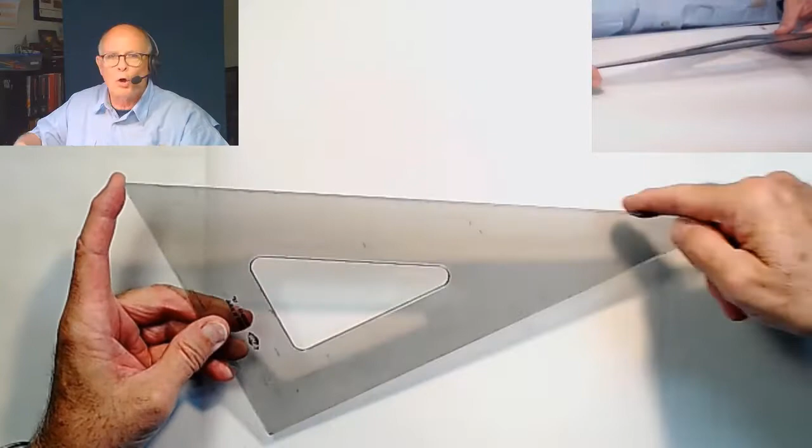An additional note is that you may want to use a larger triangle for making longer drawing lines. Since I'm doing a rough out and a block out in this demonstration, I'll just be using a smaller triangle and it works just fine because I'm going to do all my problem solving with that. When I go to do a final drawing, I may use a larger triangle simply because it'll give me a better quality of line.

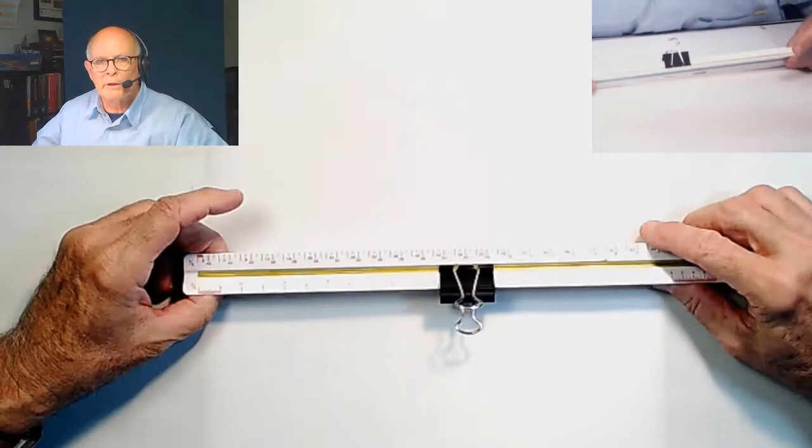Having said that, last item is, remember we are working with an architectural scale. This is the 1/8 inch to 1/4 inch scale. Just a quick note, if you happen to have a white scale, I'd like to sometimes come in and put in colors there so that I can recognize which scale I'm on. Visually, I'll always know that my 1/8 inch scale is always on this colored line, so that's helpful for me.

Additionally, I just use one of these little paper clamps here that works nice for keeping it easy to pick up and always on the right scale reference. I'm not flipping it around trying to figure out which one I'm supposed to be working on. So that's helpful for me and it just saves a little frustration down the road.

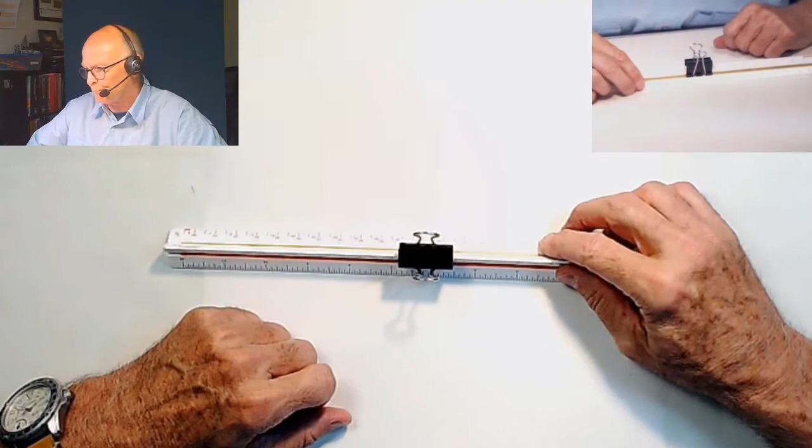All right, so things have been set up. I've gone ahead and put my 11 by 17 sheet of vellum, oriented it in a portrait fashion. That means vertically oriented, just as we mentioned previously. And I have a reference plan of the work that we're going to be doing.

So now, just as a quick review again, and making sure that you understand, we are taking a small plan and we're creating a large plan from it. That means we're going to measure at this smaller scale, and then we're going to draw it at a larger scale. That's our concept, that's what we're working on.

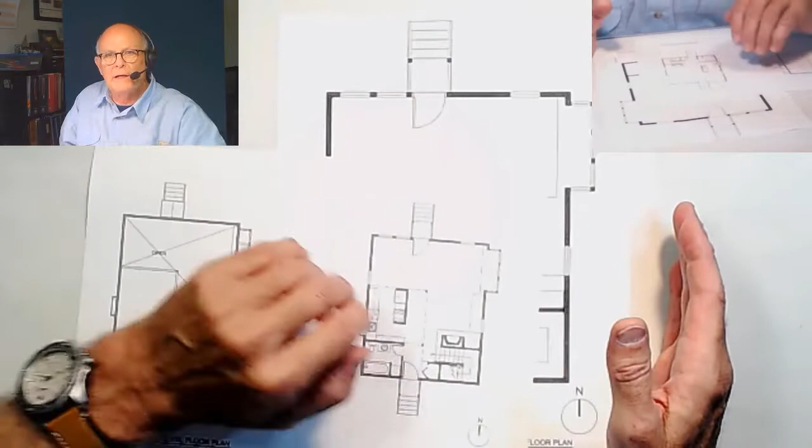So just understand that the drawing is going to get much bigger. It's going to get actually 4 times larger. So when we double the scale from 1/8 inch to 1/4 inch, we are going twice as large from here to here and twice as large from left to right. And so that means we're actually growing. This thing will be 4 times the size of this smaller drawing when we get done.

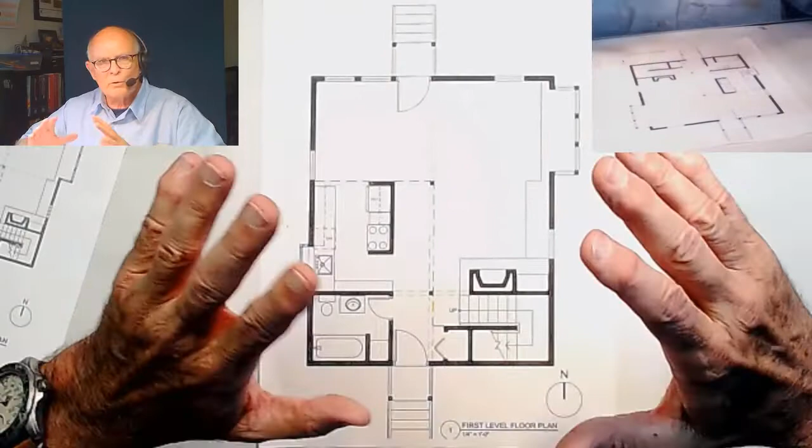You should think about that a little bit. So when you place it on the drawing, make sure it is kind of centered. You don't want to be crowding it to one side or the other because you're going to run out of room and you're going to be upset with that. So since this is a block out, we're simply going to place it somewhere in the middle and we should be okay. So we'll set that aside.

Okay, so a couple things that we need to talk about here real quick. If you look at the plan, and you should print it out and look close at it because there's some stuff going on here. There's a lot of different elements, and we'll just walk through it real quick on the plan here. We're calling this orientation the entrance side, okay? So there's a washroom right here, toilet room, bathroom, whatever you want to call it, on the left side.

A small kitchen area here. This is a very small building, very small plan. Kind of a dining, open living area here. A set of stairs right here. A small closet right here. A fireplace with a hearth, and there'll be a flush mantel overhead.

Some shelving, and then a seat. We have a solarium over here, we have an entrance porch on this side, and at the opposite side we have another porch. So those are the elements that we're working with on the ground floor.

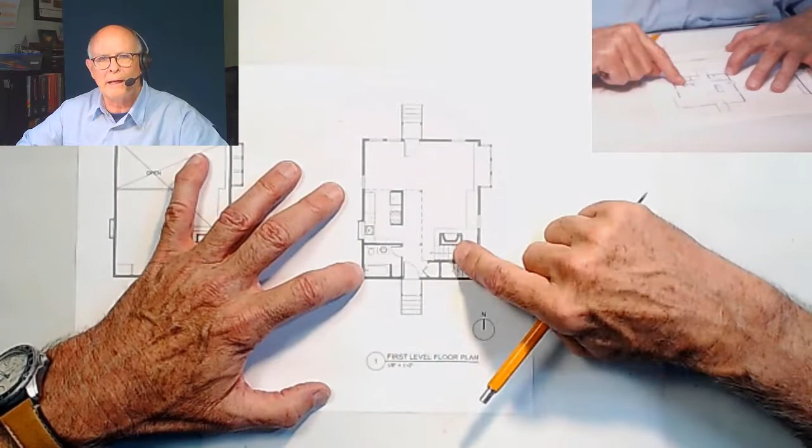When we do the second floor, it's much simpler, but let's continue on. One of the things you'll notice if you look closely is that the exterior walls, those on the outside of the building, are a little bit fatter. In this plan, the exterior walls will be 6 inches thick at a 1/4 inch scale.

So you might want to write that up here just to remind yourself: exterior walls, 6 inches. Okay, so there we go. So we've written that down.

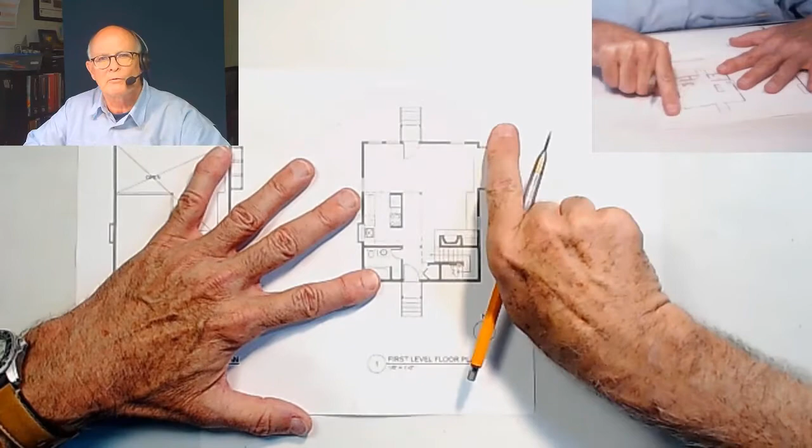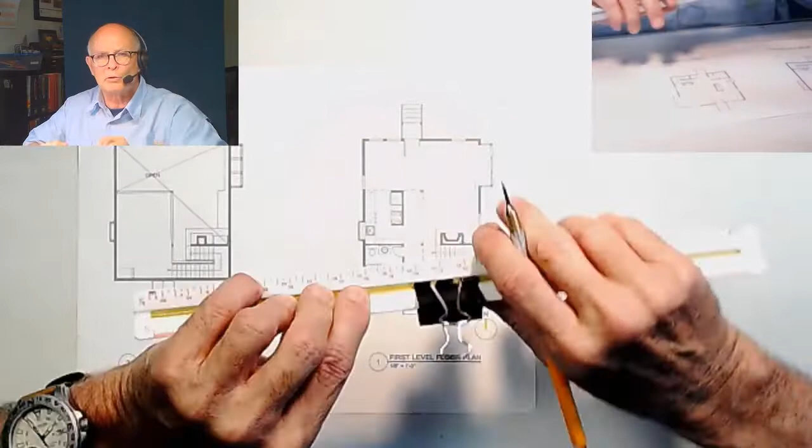But now as we go inside, you'll notice that the interior walls are a little thinner. They're only 4 inches thick. So interior walls are 4 inches, and that's at this 1/4 inch scale—actually, it'll be at all scales. When we're measuring with the 1/8 inch, it's kind of small, but you should observe that they are 4 inches on the inside, 6 inches on the outside.

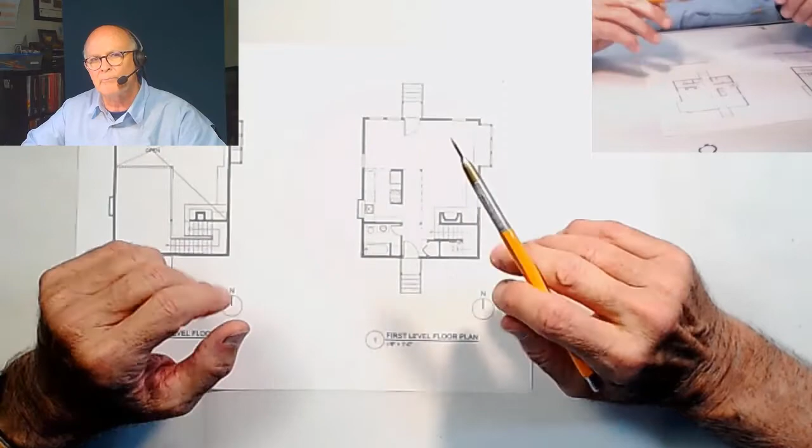And that should be pretty much the case all the way through, so these interior walls will be thinner than the exterior ones. Additionally, you'll notice that the plan has stairs going up to the porch, and some posts provided at a variety of locations to hold things up. In the case of the porch, there's a little porch roof covering it to keep it away from the elements—same thing at the other end. So you'll see a little square; that's the post in plan view.

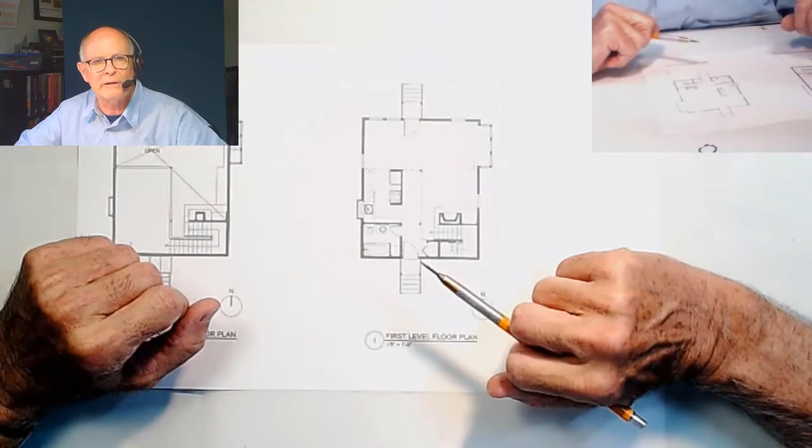Additionally, there are some interior posts here and here, so make note of that. That means there's something happening up above that we need to be aware of, and indeed, we'll see that as we go to the second floor.

There's a variety of other things here. We have a bathtub, a water closet, a lav sink. As we get to the kitchen, we have a kitchen sink. The dash lines represent overhead cabinets. The dash line in this box form is a dishwasher below the cabinet. Over on this side, we have a range, a cooking range, a small set of cabinets with overheads above them, and a refrigerator. So that's what's in the kitchen.

As we move around the elements here interiorly, we have this fireplace, and as I mentioned, we have shelving here. We have the firebox here, and there'll be a chimney overhead that we'll see in the second floor, but not on this plan. Then the stairs going up get to a landing, a flat spot, turn around and continue up. Here we see a break line, which we talked about a week or so ago. So we'll talk about all that as we get a little closer to it.

But I wanted you to know what the parts and pieces are that you are working with. And then finally, this element out here, this is like a solarium—it's like a big bay window, a little bit larger than just a bay, so we're calling it a solarium. And it's a window seat. This line here represents a built-in seating frame for placing cushions on—like a built-in couch that becomes a built-in window seat. So that's what we've got there.

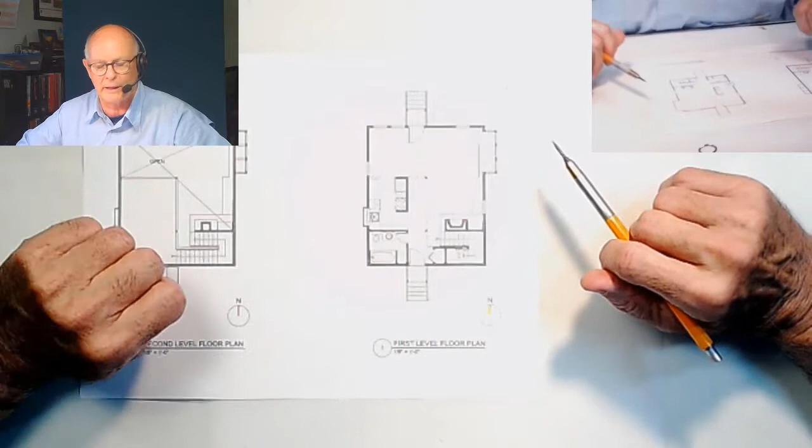The other thing we want to do is start with the idea that it's a good starting place to find the size of the object in its general sense—the idea of how big the box is. So to do that, we're going to scale that.

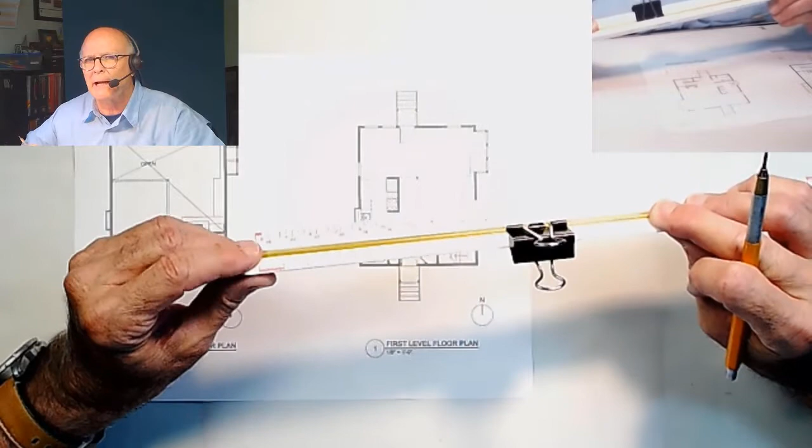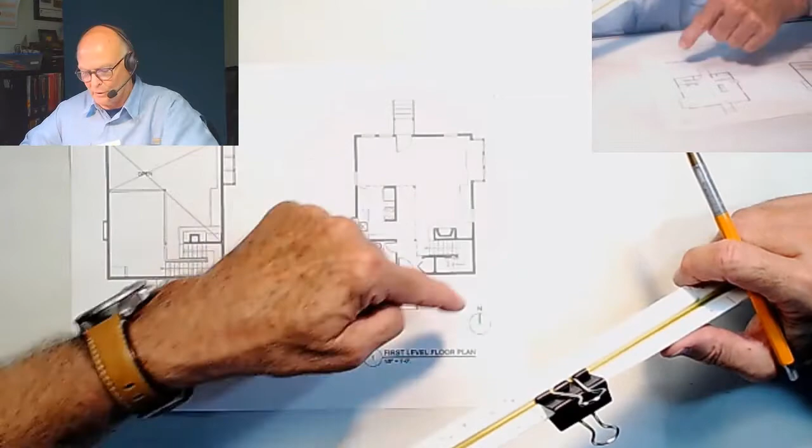I'm going to give you some numbers here, and you can use my numbers if you want. I'd suggest finding out specifically when you print out your example plan what those scales are, and work with them to ensure consistency. Understand that not all copies are the same—if you run this through a printer, you may get a slightly different size box or object than I've got here. If you copy it on a copier, that may stretch the copy and you may be a little different there. Just be consistent—whatever you choose, you choose. I'll give you my information and you can use that as a reference moving forward.

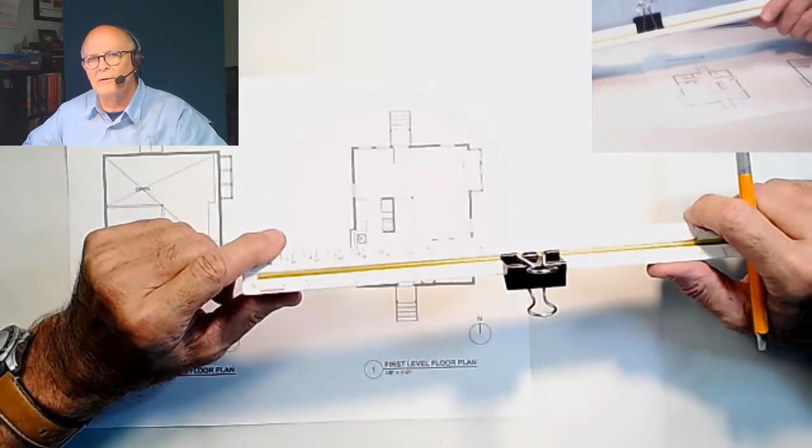Based on that, we like to get the box enclosure and measure from the outside. By measuring from the outer sides of the walls, we're getting the extent of the box—the total size of the object.

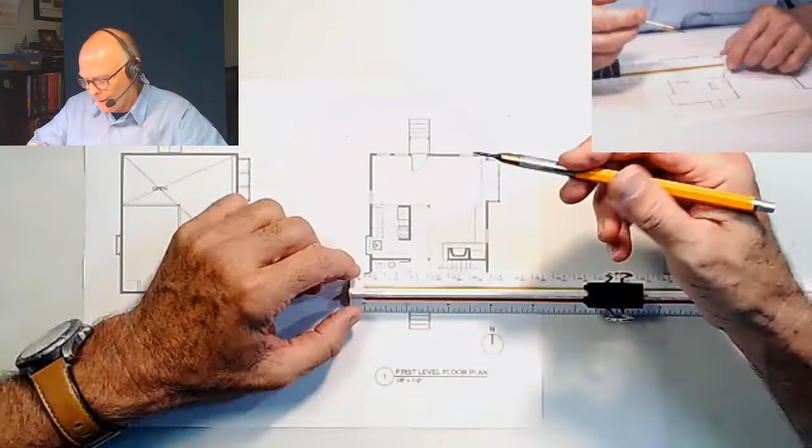As I measure this, I put the 0 on the wall and come across, but it doesn't hit exactly on one of the hash marks—it's a little off, not a nice whole number. So I slide the scale to the smaller side to find the next smaller number, and observe the tick marks, which are inches left over. So as I measure, I go 0 to 20, 21, 22—so it's 22 feet, and 2, 4, 6, 8 inches.

So I'm noting on this drawing that it's 22 foot 8 inches in width. That means this width is the same, that width is the same, that width is the same. Please make a note of it and measure and mark yours.

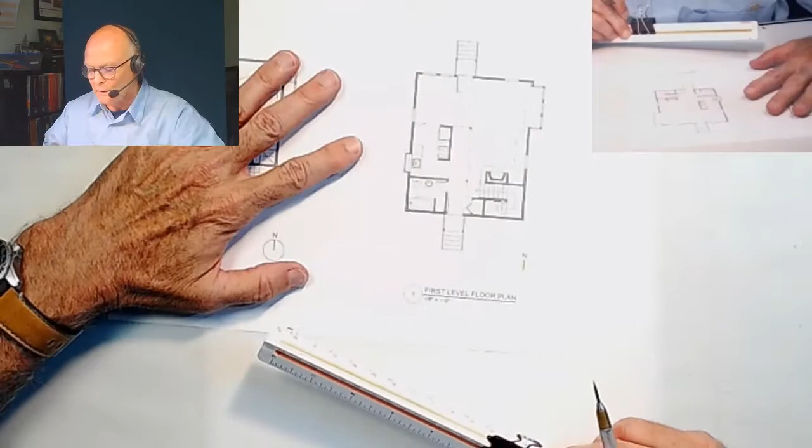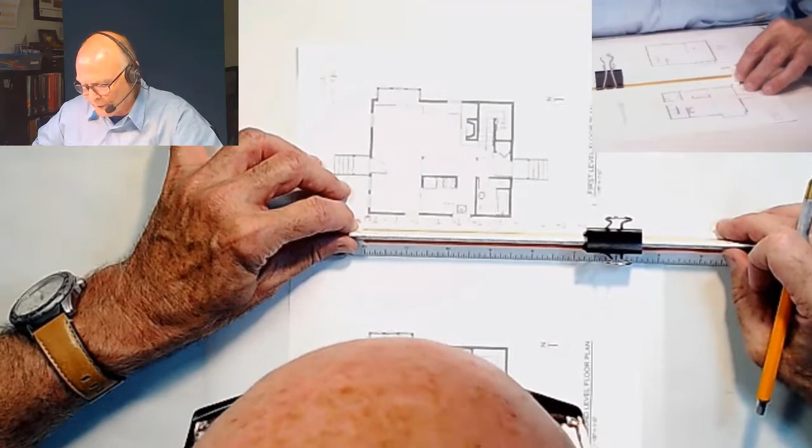We're going to do the same thing in the other direction so we know our box size. As I look at it, it looks like I'm a little larger than 27, so I'll slide the scale back to the 27 mark and measure to the left side of the 0, and I got 2, 4, 6. So I'm measuring that again at 27 foot 6 inches.

Now I mark that on there so I always remember what it is. It's not a bad idea to keep this drawing around as we go forward—in case you forget, you'll have it marked on a sheet.

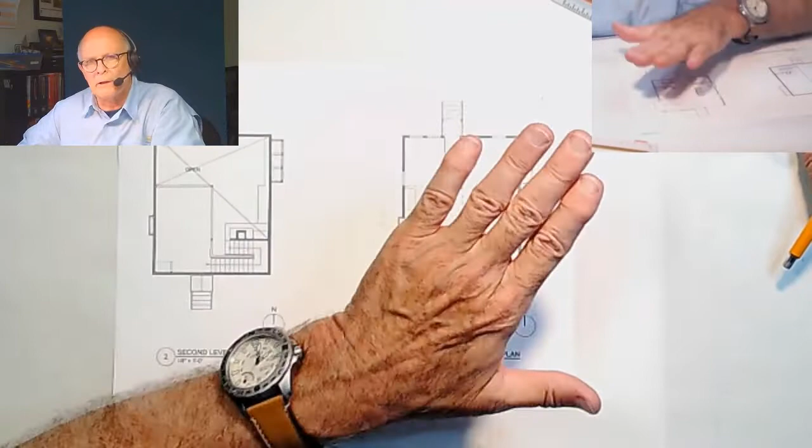In this particular exercise, we're only going to do the ground floor. We'll come to the second floor in the next installment, but we're going to draw this one up real quick. Now that we know the size of the box, we can draw the size of the box—let's just do that real quick.

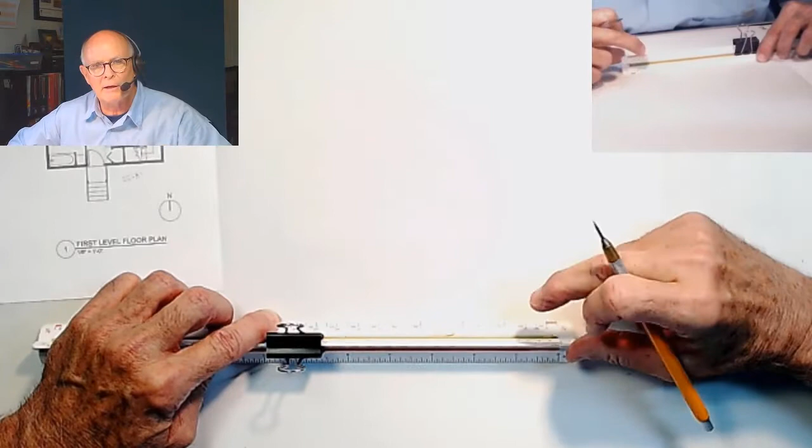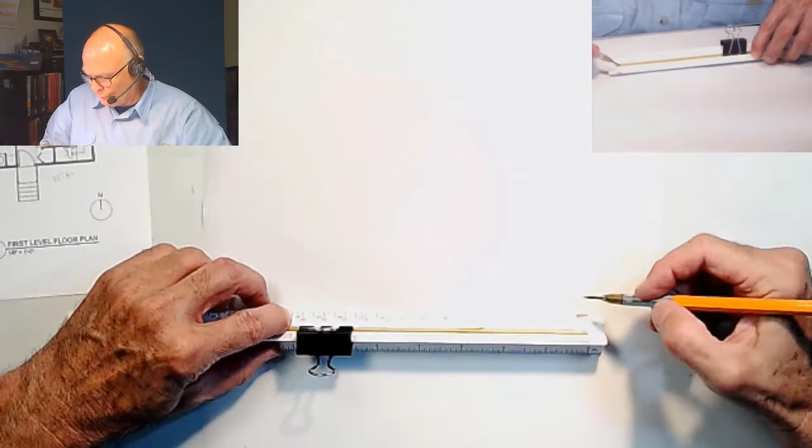As I mentioned, we want to measure off the 1/4 inch for the drawing side, not the 1/8 inch. So if I start and want to be in the middle, I'm looking—24, 25, 26, 27 goes to there. So I'm going to make a mark here and a mark here.

I'm not done—I'm going to add in, oops, I'm doing the width, I'm sorry, let me get that back. 22, not 27—22. So start over here again: 0, go to 20, 21, 22, and then I'm going to add in 8 inches. So I've got my 22 measured, and I go 8 inches, and it's right there.

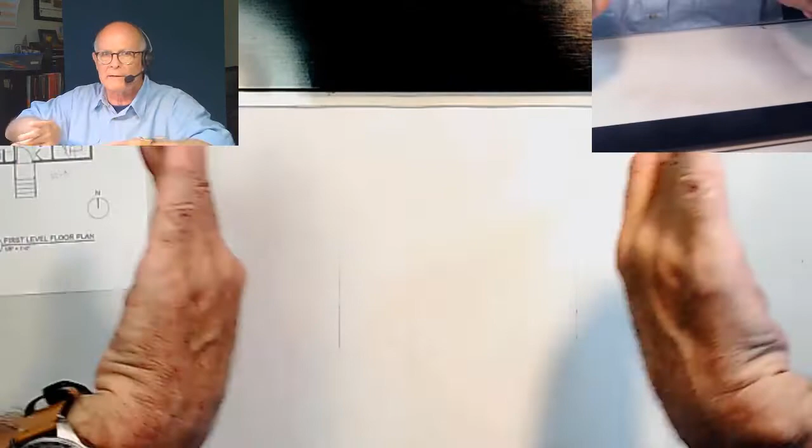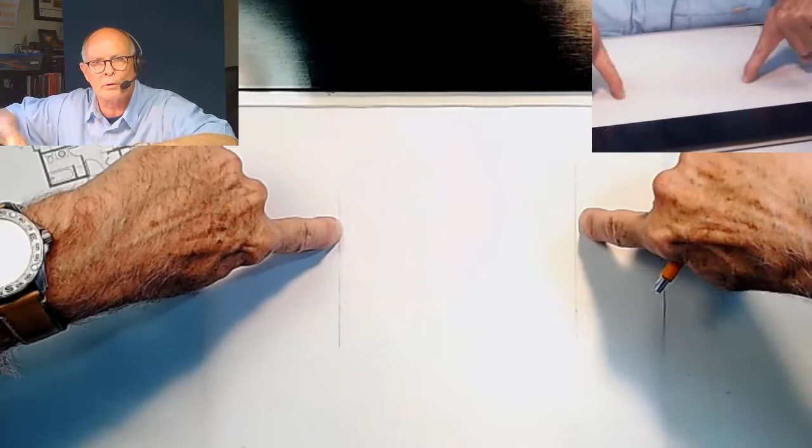I'm just going to put a vertical line at each point, the beginning and end point. Remember, these are the outside lines of the wall, not the insides—we'll talk about inside stuff in just a bit. Our object is no wider than that, so we're not wandering around the sheet. The majority of our drawing is going to be right between those two lines.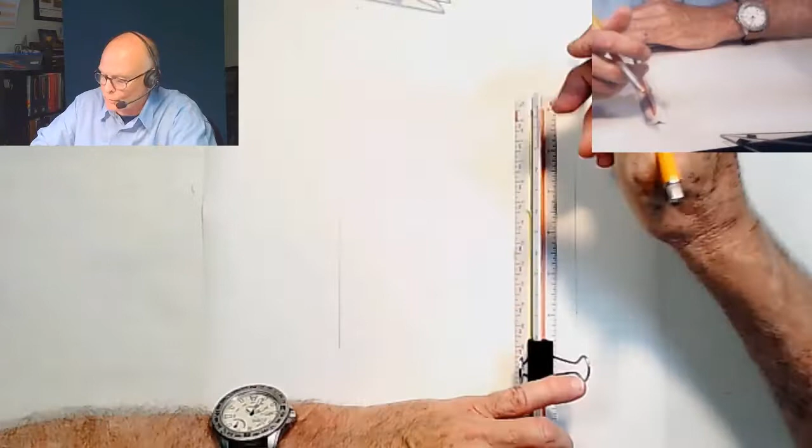Now let's get the other direction. We said it's 27 foot 6 inches, so now I'm going to measure that in this direction to get the box size. Again, remember we're working with 1/4 inch. So I go 6 inches, then 27—I start at 0, go all the way down to 20, let me make sure I hold my spot, 22, 23, 24, 25, 26, 27, so I'm marking that.

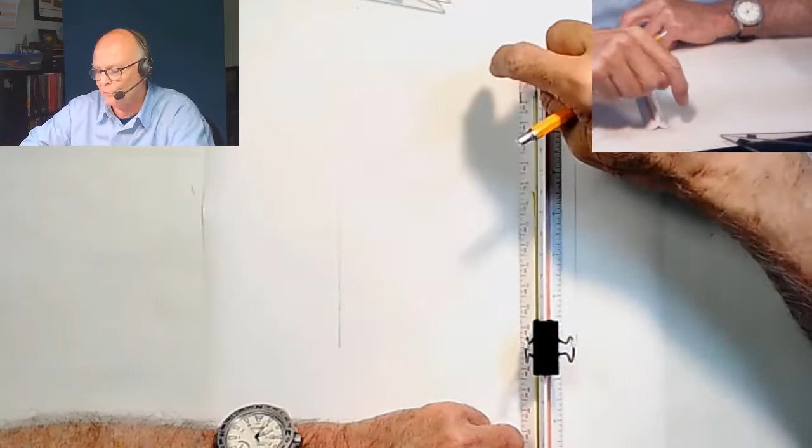And then I'm going to come back up on this side and go 6 inches. So 1, 2, 3, 4, 5, 6. On the 1/4 inch side, it's 1 inch modules, so 1 inch increments, because it's a little larger. Because that space is bigger, we can put more divisions in it. So every little tick mark on the other side of the 0 is 1 inch. When we did the 1/8 inch, it was every 2 inches, just because the space is so small. We just can't accurately get a good picture of that.

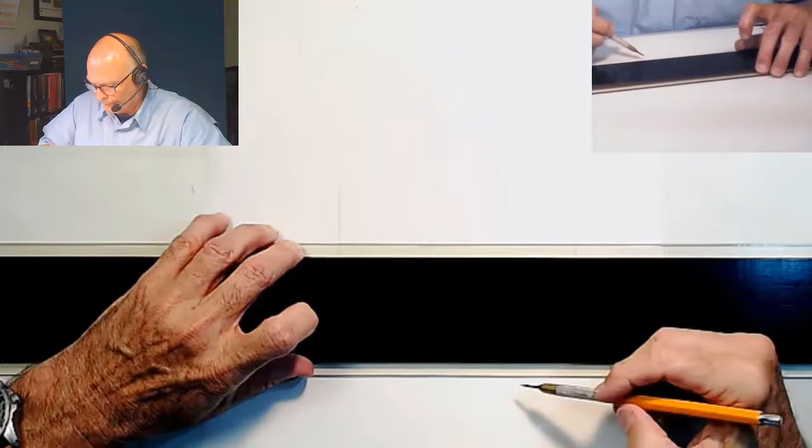So now I've marked that. I'm coming down here. And I'm going to come up to the top here.

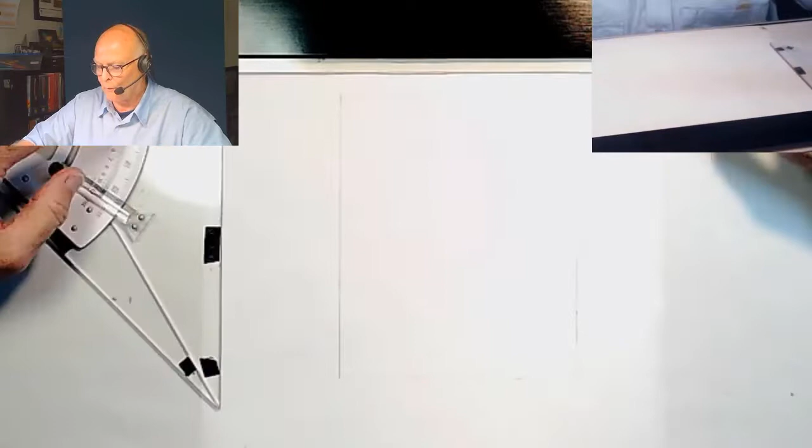Okay, so the box is this big. This is the total size of the building enclosure. Now, are there some things on here that are going to come back? Yeah, we've got the porches and we've got the solarium. We've got a little greenhouse window here. Those are all going to pop out. But the main box, that's the main box. And it's right here. Okay, so now that we have that, how thick are the exterior walls?

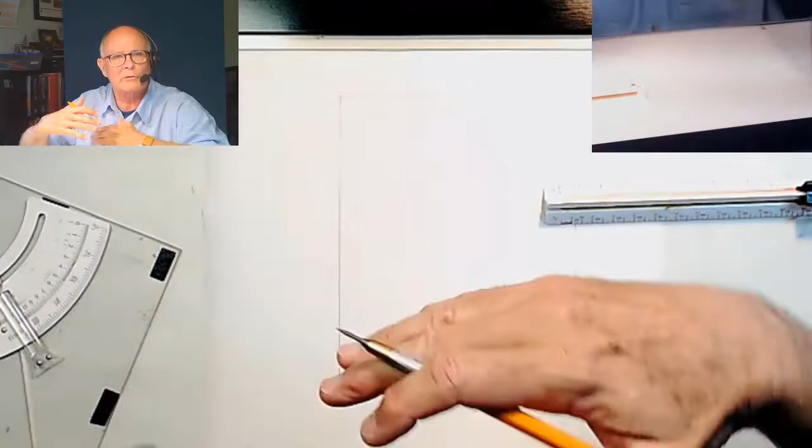You should be saying 6 inches. So I'm going to come back over to my scale, looking at the 1/4 inch again, and I'm going to give myself the 6 inch all the way around on the inside. Now don't mark it on the outside—it's on the inside of the box, because we measured to the outside. Everything is going to be inside this box. So mark from 0, go over 6 tick marks, do it at that side. I'll go ahead and do the top one too, so we keep things moving along quickly. So we do it there. We do it down here. Okay.

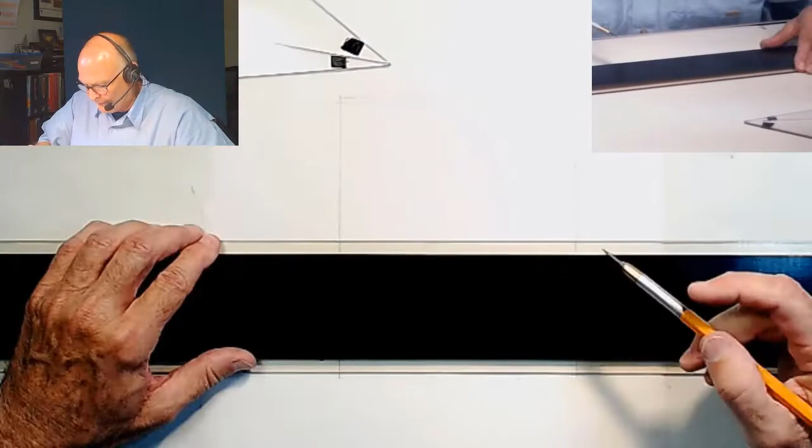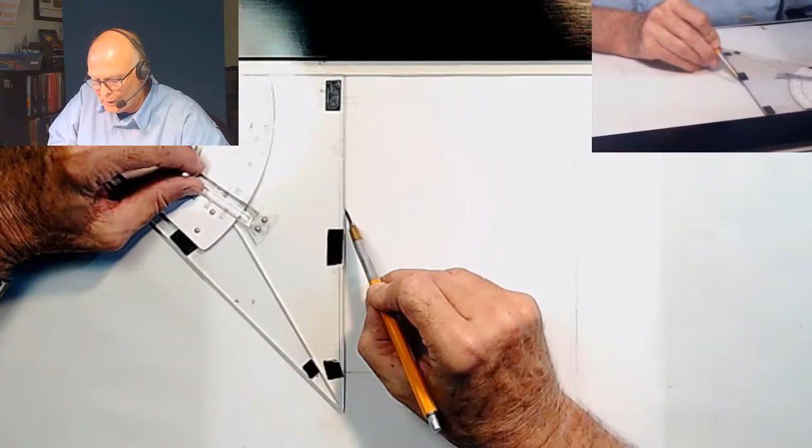Again, I could be a little looser. I want to be pretty darn accurate, but when I say my lines can be a little bit loose, that's okay, because it's a mock-up or a block out. And when I do that, that means I still have a lot of things to solve in terms of how the plan is going to come out. And I'm not worried about the final line weights or anything—I can pick those up a bit later when I do the final. Okay, all right, so that's the box. I've done it light, you can see it. Hopefully you can see it. I'll see if I can lower some of the light on this side there. There we go. Okay, so now you can see the box a little bit better.

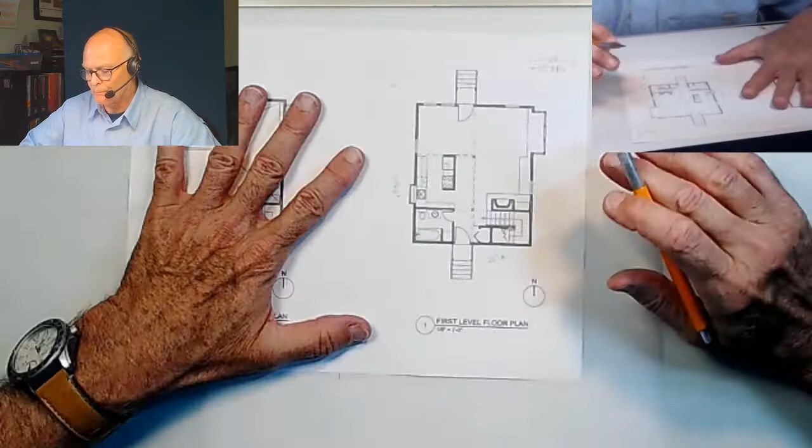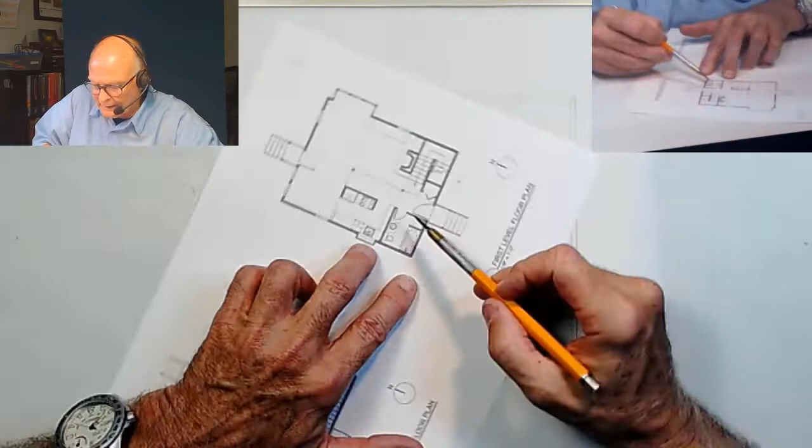All right, so that's the envelope, that's the shell of the building. Now we got to put all this stuff in the middle. Now, as we do this, I want you to observe some things. Look at the plan, look at the plan close. You're going to see some dashed lines, and those are lining up with things. There's an alignment occurring. So let's start with the idea that as I look at the interior walls, I'm finding an alignment of this wall to the back of the fireplace wall at the stair. Those line up. If I draw this line, I can continue it all the way across there and not measure and draw it twice—so try to find those savings in time. Next, this wall wants to line up with this one.

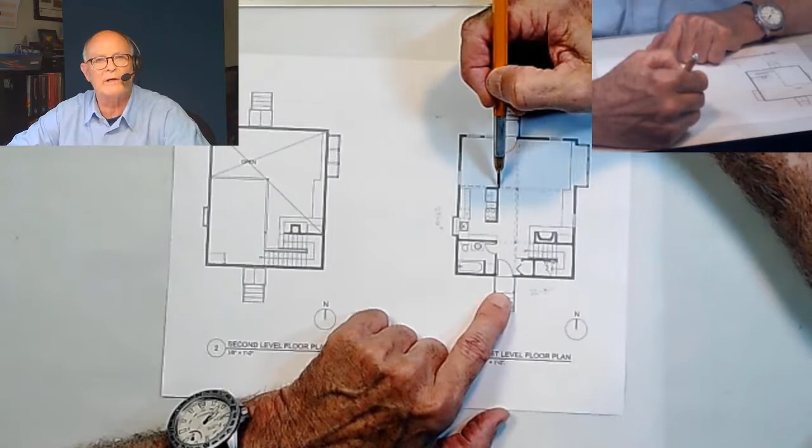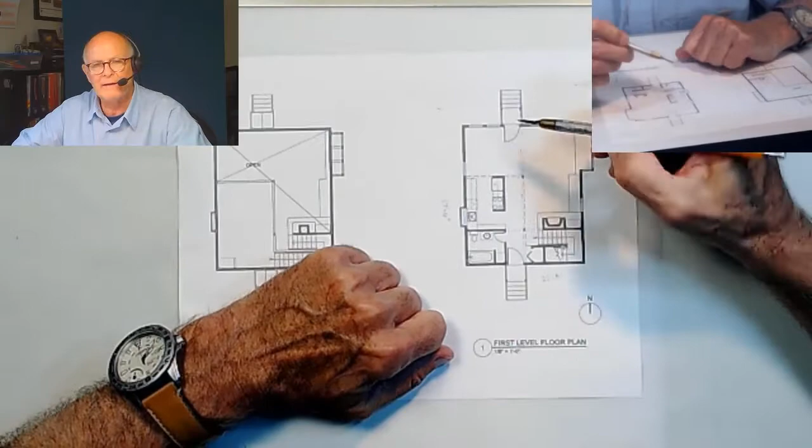And if you're not certain, put your triangle on them. There they go, you can see them—they line up. So wherever possible, try to find those alignments. So we know this line, if I draw this line and continue it up, I've got that point there. Okay, is there anywhere else? Well, it looks like the end of the kitchen over here aligns with this post. And this post aligns with this post. And all of this aligns with the door jamb here and the door jamb here. So the doors align—that means you shouldn't be measuring a lot. If you get this one drawn correctly, you should be able to project that line up and find that opening. So that's some quick cues that'll get us along there.

Now, some other things that we'll notice about the plan, and as I draw them, you'll see me moving along, and I'll discuss them in a little bit more detail.

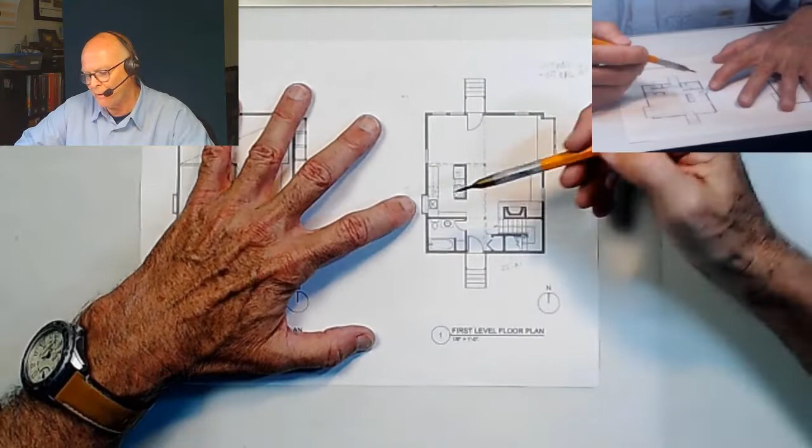These are the windows that need to be provided. There's 1, 2, 3, 4, 5 windows. This is like a greenhouse window over the sink in the kitchen, so that's also a window, but I'm not counting it as a conventional one. I've got 2 exterior doors, and then I've got this solarium assembly.

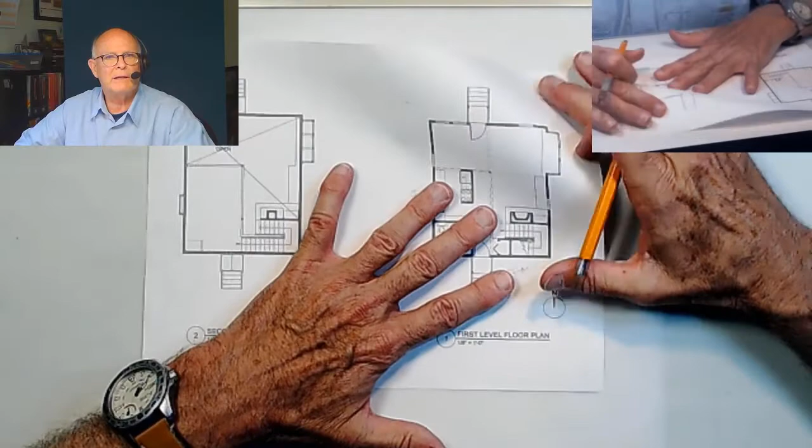So again, these are the things I need to be measuring and marking as I'm doing them.

So now I'm going to start with those big alignment walls that we talked about. For my purposes, I'm going to start in this corner. It seems to be about the most consistent form in any of these, and it seems like I should be able to measure it pretty easily.

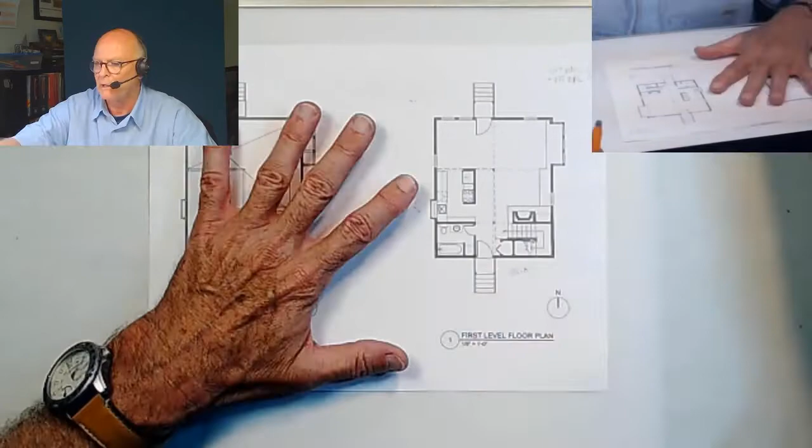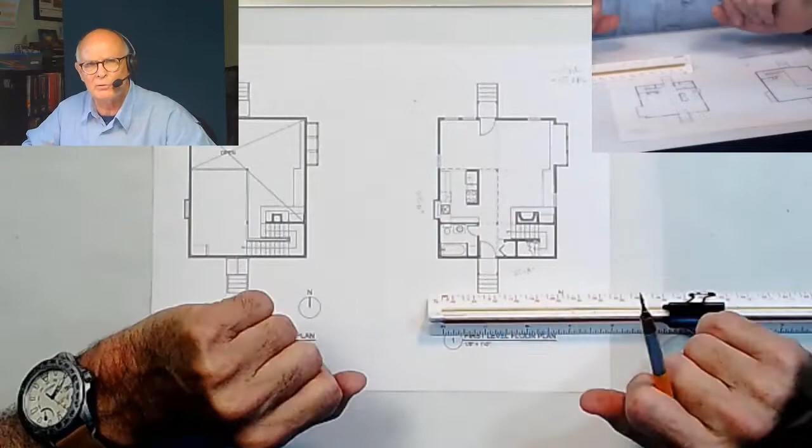Using my 1/8 inch scale, I'm going to look at it, and since I'm drawing interior walls now, I'm going to try to use interior dimensions. That means I'm going to try to align the interior of this wall with the interior of this wall, which should make it simpler. You've got to be a little careful, making sure you don't start flipping and flopping and getting the outside and the inside mixed up. Just be consistent. So I'm going to try to use interior as much as I can, and if I can't, then I'll flip out to the outside. But let's try to think about interior.

So I'm looking at this, and it looks like it's pretty darn close to an even number, and we're going to say that it is. For this exercise, as I look at the width of this bathroom, I'm 1, 2, 3, 4, 5, 6, 7 feet even on the inside. So I'm just going to mark this with the other side, 7 foot.

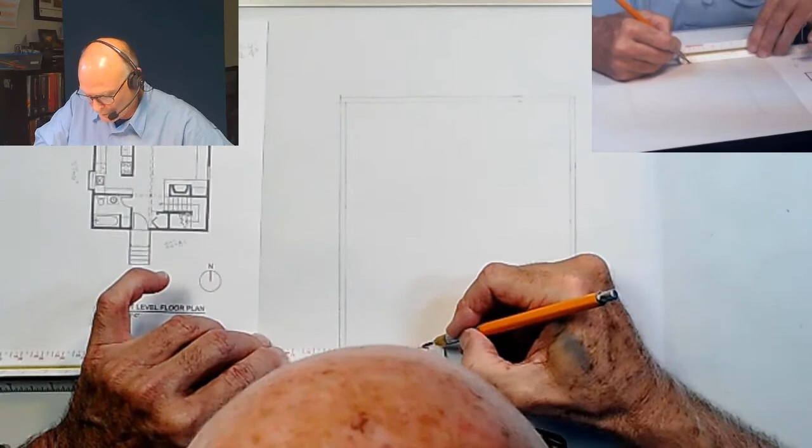I'm just going to make a mark, and I know that the thickness of the wall is 4, so I'm going to come in and pick up the 4, extra width there. Now, as I draw this line, I'm just going to extend it almost all the way up. I'm going to stop it up here. I'll find the place to stop it in a minute, because that lines up with that. And so I'm just going to continue that wall up.

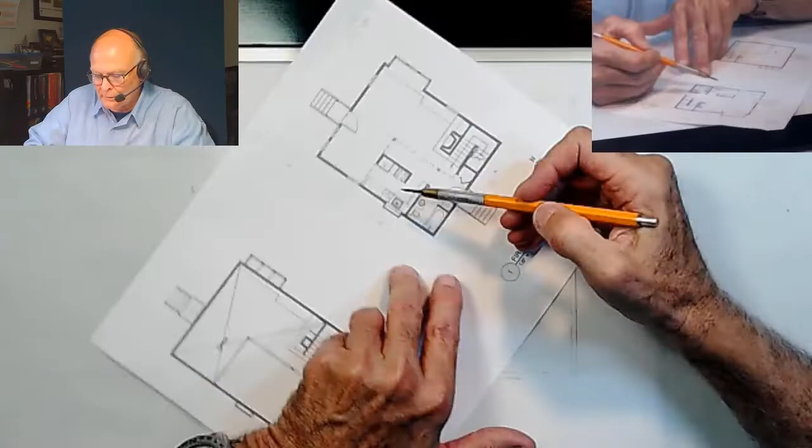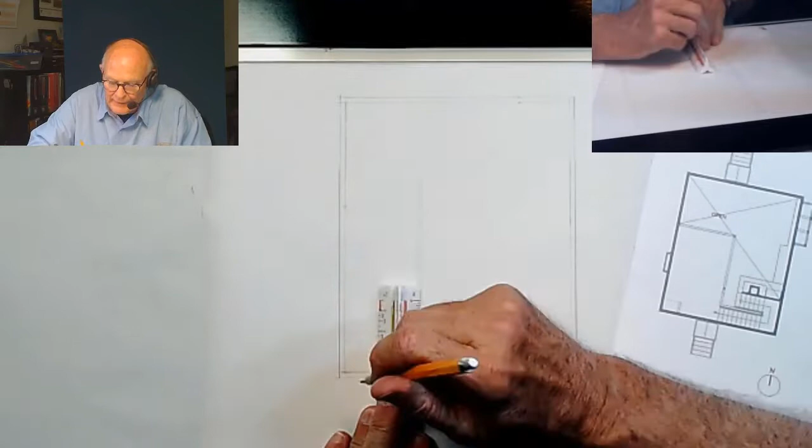Now, as I mentioned, this line also aligns with that one, so let's find that. Again, measuring inside, it looks like it's pretty close to 6 foot to 6 foot 2. So as I measure, come back over to the 1/4 inch side. On the inside, again, 6 foot and 2 inches, which goes to there. Again, inside.

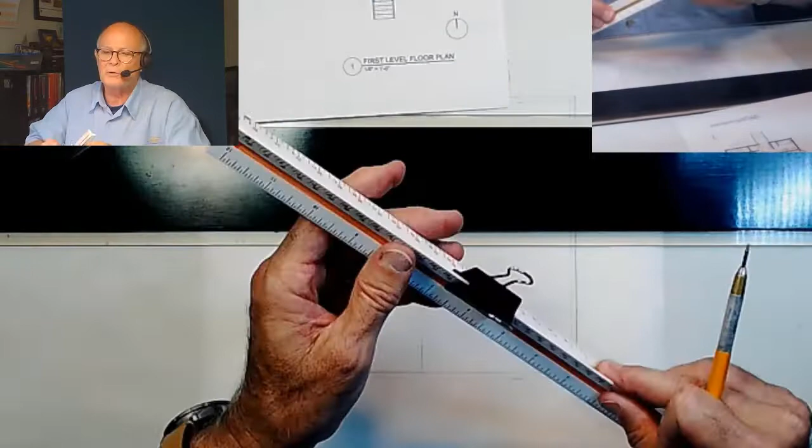And I'm going to extend that across. Again, light lines are probably better, so if you do find that something is amiss, you can erase it and not have it be a confusing line. We want this wall thickness, since it's inside, to be 4 inches. So I've made the mark, measured it, and I'm projecting it across.

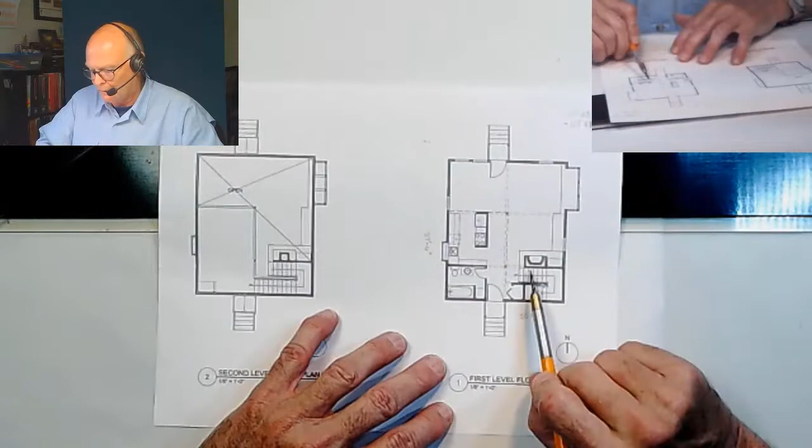So I've now found this room in its general placement, and I found this wall and this wall with it because of the alignment. Doesn't always happen like that, but when it does, take advantage of it. All right, so let's move up.

Now that I have this, I'm not going to fill it in. I'm going to come back and do the detail work inside in just a bit. What I want to do now is be thoughtful about progressing across the plan in a simplified way and getting the major elements located before I actually draw them in too much detail. So this didn't take very long—it just took a couple measurements, and I got this portion pretty well set up.

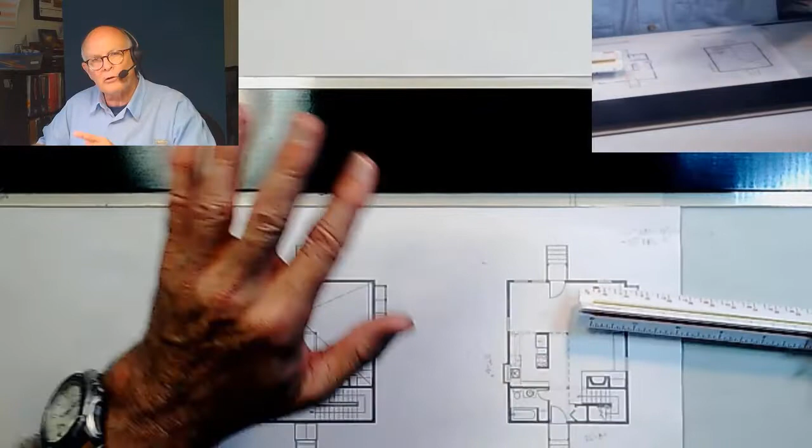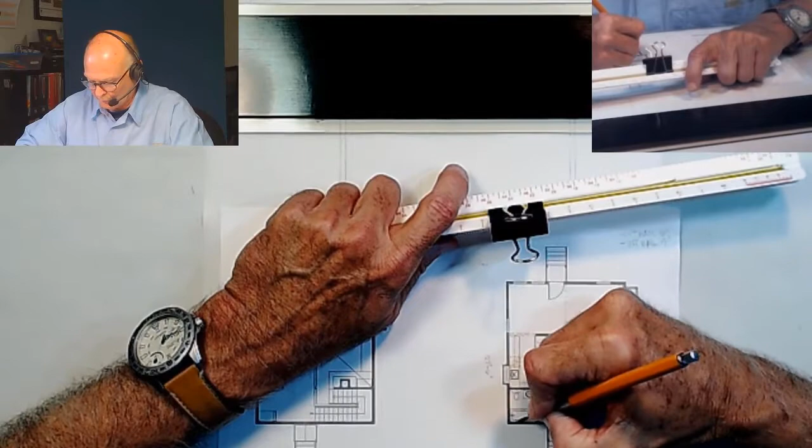For this exercise now, I'm going to start taking more dimensions, so it's good to do them now maybe in a series. So maybe it's okay to mark on the plan. I think we said the inside here was 7 foot 0 inches, and in this direction we were 6 foot 2. So I'm making a note: 6 foot 2 and 7 foot 0.

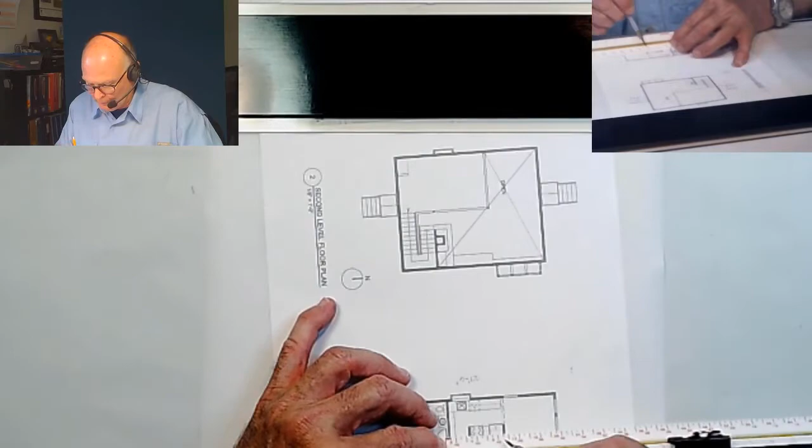Now I'm going to do the same thing, trying to figure out where this wall begins and where it ends. So I'm going to measure it inside again, flipping it inside the kitchen wall, and it looks to me like it goes pretty much 10 feet even, pretty darn close on my scale. So that's what I'm going to mark it. Using my scale, go over here, marking it at 10.

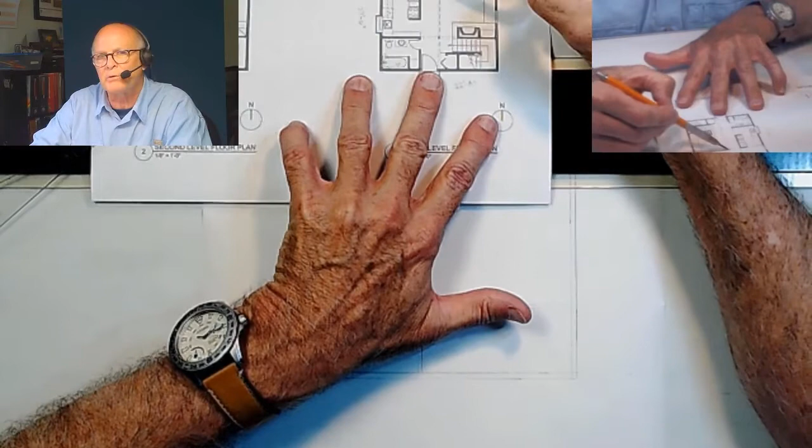Now, if you look here, you see the dashed lines. It's going to pick up those posts out here. So I'm going to be thoughtful of that. I have measured the inside, and now I'm going to go that extra 4 inches outside to get the placement of that wing wall.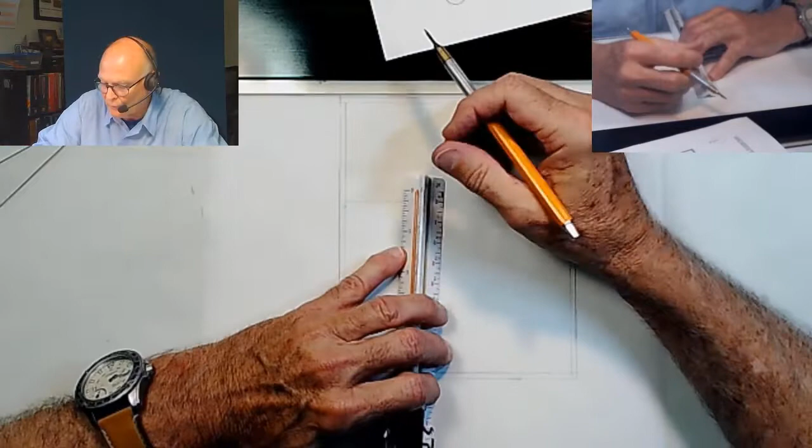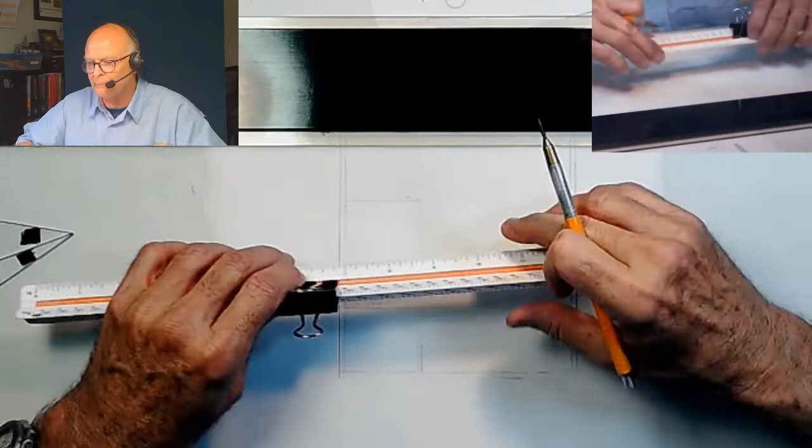This wing wall right here, okay, so we know that's 4 inches. So I'm doing the 4-inch right there, marking it. I'm going to extend it out just a bit, clean up the corner. I know it doesn't extend out that far. Now, I know the box of the kitchen, I'll clean up where the openings are in just a minute.

Let's walk over to the stair and see if we can figure that guy out and get this area defined a little better. One of the things we're going to notice is that the entrance door has a relationship to these dashed lines.

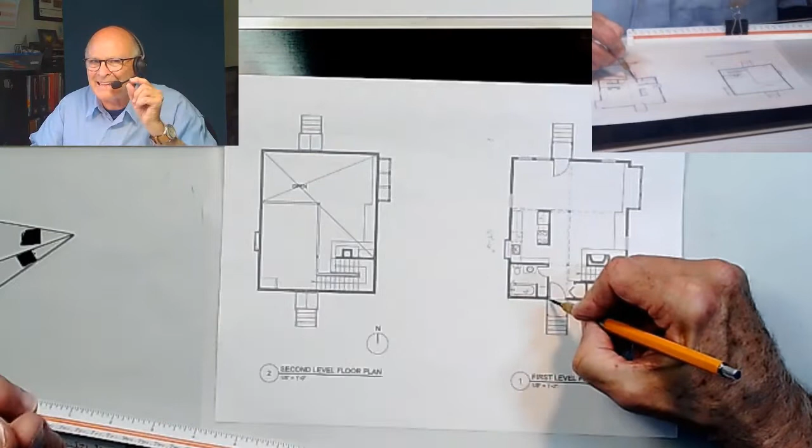It basically lines up with the jamb, and we'll see how that works in just a minute. One of the things we're going to do is measure from the corner, the very corner of the outside of the building, using the outside wall, to where the door opening is—not the little white piece of door jamb, but actually where the door opening is. So let's use that as a reference.

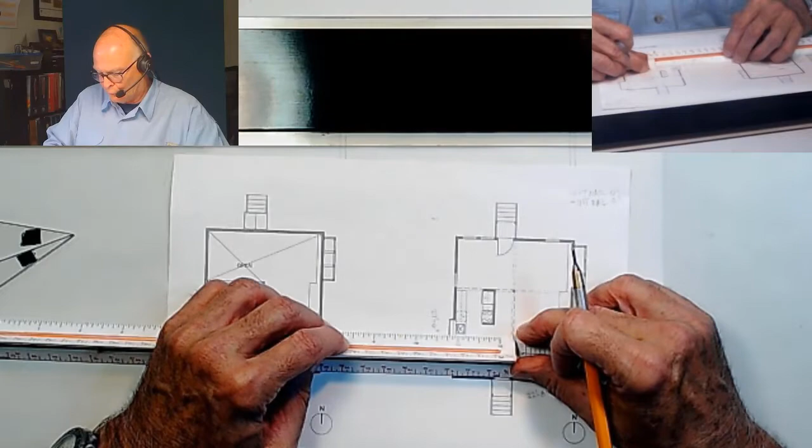So as I measure that, again, I'm going to have from the outside, I've got pretty darn close. I'm going to say 8 foot 2 inches. So 8 foot 2 inches from the corner. There's that, and there's my 8, and that's where that's occurring.

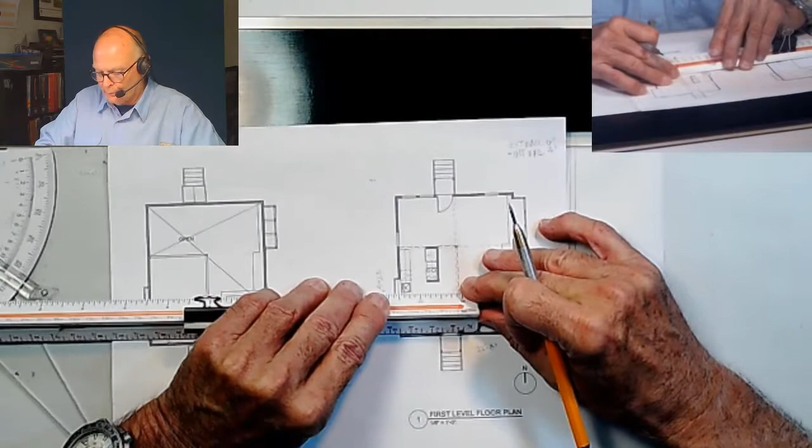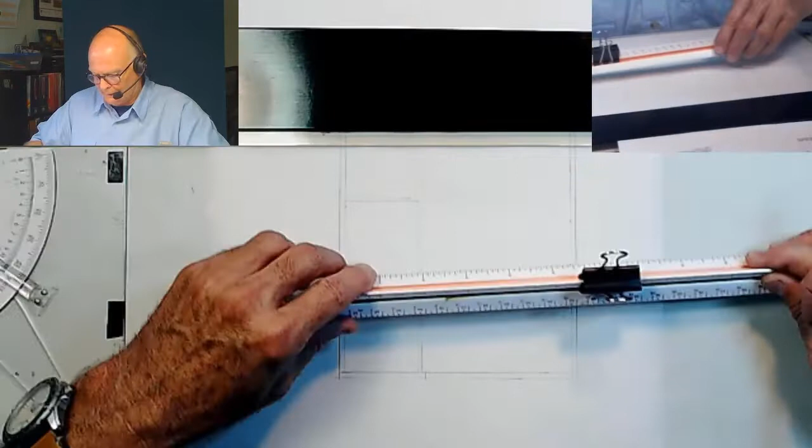Now, as I measure, the door wants to be—oops, get the right scale—the door wants to be a 3 foot 0 inch door. So it's a 3 foot door. I think the interior, well, there's not very many. Some of the doors are a little bit small, but this is kind of a funny little plan, so it's okay. But the outside door, 3 foot, we're going to mark that on this side also.

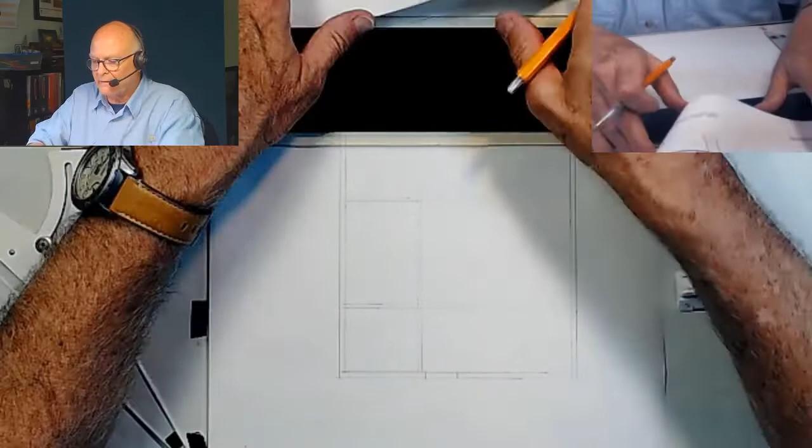All right, so that's where that door is. That's where that opening is going to be. So I'll kind of erase a little bit around it so that I remember what it is.

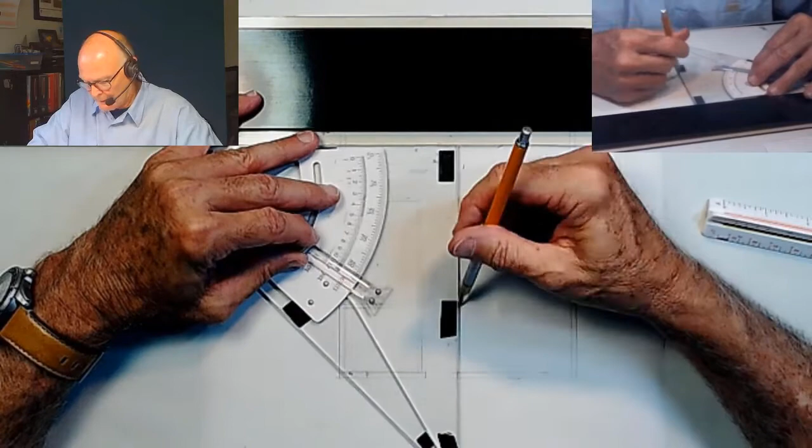Now, if you look closely, you'll notice that just inside the jamb is where the first dashed line starts, just past the thickness of the door frame. Frame and jamb are common terms. So that is about 2 inches in, and I've extended this over the opening. I've made a mark over an additional 2 inches, and now I'm going to extend that line up in a very light way, and that represents this interior line.

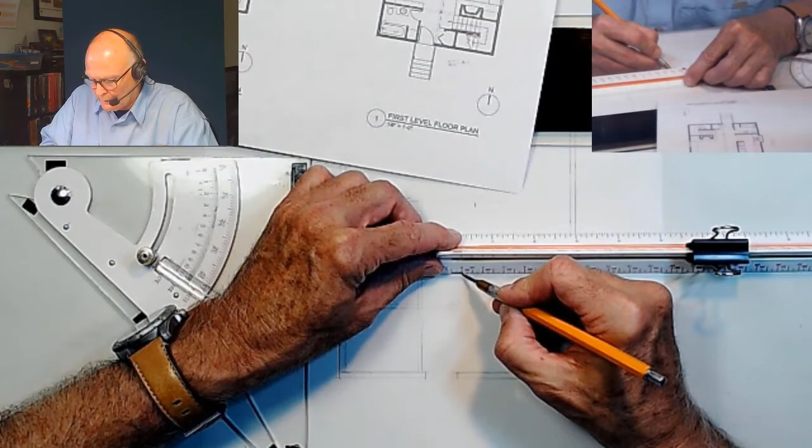Now there's another set of lines on the outside, and we're going to find that by using the rule that all interior structures and walls are going to be 4 inches. So that means that one wall, or that offset for those dash lines, is going to be 4 inches off. I'm going to make that just a little bit more pronounced.

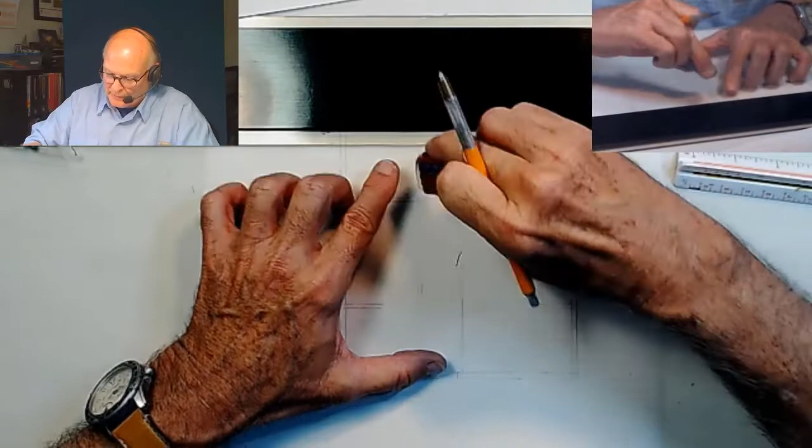Okay, so now what I have is—and I can put some dash lines there and dash lines there. Okay, now, so now I know where this element is, and where this piece starts. All right, so we're going to just have to kind of grind out some measurements here, but we're keeping it light for the time being.

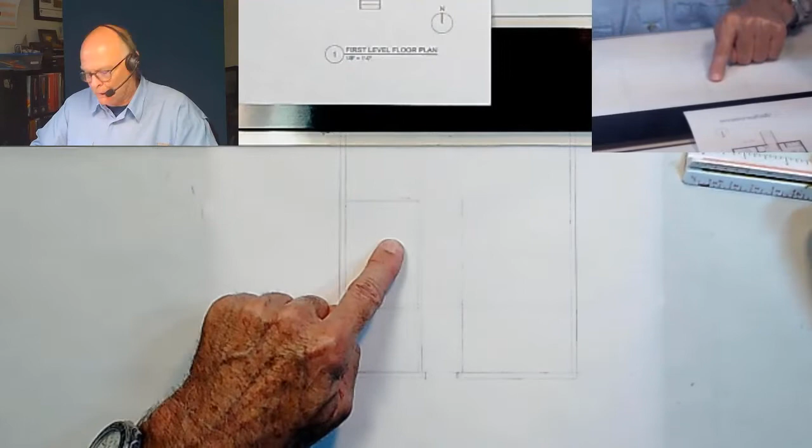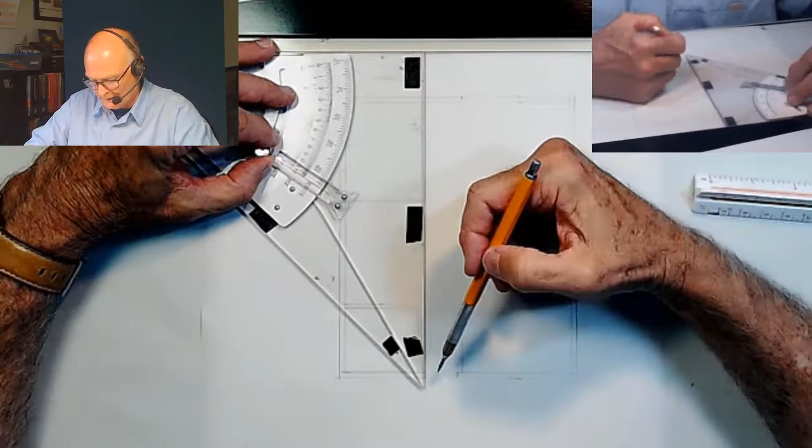So we've got the bathroom, we've got the kitchen outlined, we've got the post located up here, we've got the post located up here, we've got the door we just put in. We forgot to make a note that this door aligns with this door. So using the parallel and the triangle, we're just going to project up lightly again, and that's going to locate that door opening.

All right. So now we have door opening, bath, kitchen, and we got to work on the stair here.